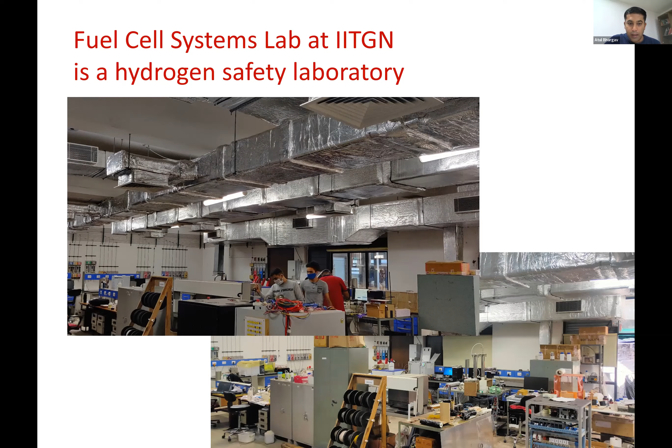This is our laboratory at IIT Gandhinagar, a hydrogen safety laboratory. It is equipped with the right kind of air ventilation, hydrogen leakage detection, and other safety systems required to handle hydrogen, carbon monoxide, and hydrocarbons all at the same time. This is one of the facilities we developed over the years, and this is where we work. Just to give you a glimpse of what we have developed so far, we are a very applied laboratory where we apply a lot of science and technology to realize prototypes and then demonstrate these prototypes, much like Professor Abhishek and his laboratory and research team.

So what have we done so far? Highlights of our research, which have resulted in prototype demonstrations, proof of concept studies and so on: we have developed at TRL6, in collaboration with Thermax, DST, and Reliance Jio, a replacement of a diesel generator for telecom backup power. Telecom backup power is one of the largest consumers of diesel in the country.

Just to give you an idea, diesel generators consume about 17% of the total diesel consumed in the country, and they are the second highest diesel consumer as a group. The biggest one is the transportation sector at 70%, and the second one is the diesel generator at 17%.

One of the things where diesel generators are used very often is cell phone towers. There are about 6 lakh cell phone towers, and with 5G they are expected to go up to 14 lakh towers. The grid is not very reliable in India. So we developed this technology to have a methanol powered fuel cell system that is more than double the efficiency of a diesel engine, has nearly half the CO2 emissions, is cost effective, and does not rely on imported diesel, which also gets stolen in many remote locations. It was a proof of concept demonstration, first of a kind in India, done in collaboration with these organizations. So that is one of our achievements.

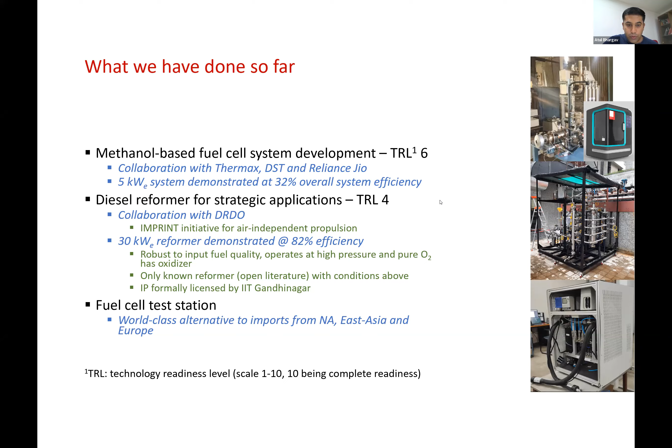So this is in a nutshell what we work on. I think if we were to put it in one slide, this is what we work on - we make a platform that is to some extent versatile and robust to fuel input.

Some places you have methanol available, some places ethanol, some places ammonia, CNG, bio-CNG, diesel in case of strategic initiatives, and others, right? And people are talking about green hydrogen. You might have heard of it, but it's not yet available. And so there is some uncertainty and unpredictability with respect to fuel availability.

So we want to make our system robust to that particular aspect, and our platform is that. So what we do is we have an internal converter that converts the available fuel input or hydrogen carrier input, as I will show in the coming slides, into hydrogen on board, on demand, and on site. And therefore, we are able to use fuel cells where previously fuel cells would not have been able to be used because of lack of availability of hydrogen.

And of course, that fuel cell is tied to something called balance of plant, which I will show in a moment. And then you get double benefit in the sense that you get electricity, of course, but you also get waste heat from the fuel cell stack, and this waste heat is at a high enough quality that it can be used for heating or for cooling. For those of you not familiar with mechanical engineering, you can also use waste heat to actually cool - it appears very counterintuitive, but it can be done. These are called vapor absorption refrigeration systems, and these are now becoming commercially viable. So when we couple it with that, this high grade waste heat can be used to cool as well.

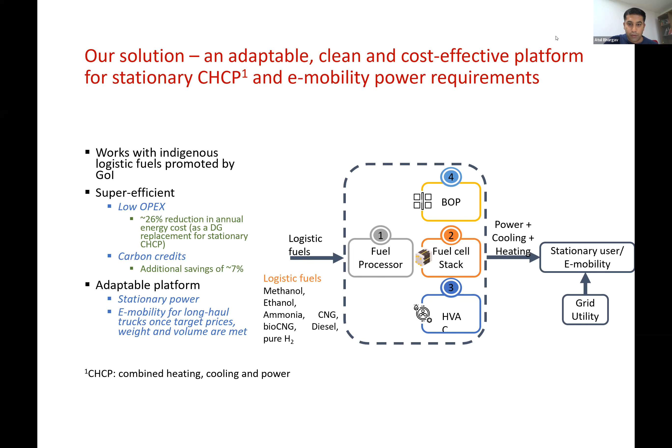And also in aviation, of course - in aviation there are some simplifications that we need to make, and these HVAC systems etc. might be too bulky and too heavy to carry. And so therefore we might have to make some changes to this platform. So this is the background of what we do.

Now, fuel cell, right? So I'm told you are students, so I'll just briefly describe what a fuel cell is, and also hopefully bring out what is different between a fuel cell and a battery, right? So for example, what is a simple fuel cell?

It's a different kind of polymer, but it's a polymer nonetheless. It looks like a transparent white polyethylene sheet. That's all it is. And what it does - it's selectively permeable to H plus ions. So if you have an excess of H plus ions on one side relative to the other, the H plus ions can go through this membrane and show up on the other side. Now, it's not permeable to other things, including molecular hydrogen. So hydrogen cannot actually go through. Hydrogen ions can go through, but not hydrogen itself, right? So whether you're talking about molecular hydrogen or atomic hydrogen, it cannot go through this membrane. Similarly, on the other side, you have oxygen or nitrogen, whatever it is, that cannot migrate to this side. Of course, there's a small migration that happens in reality, but as a concept, nothing else can migrate. Only these H plus ions can migrate. Why? Well, that's the chemistry of the membrane - that's how it's engineered.

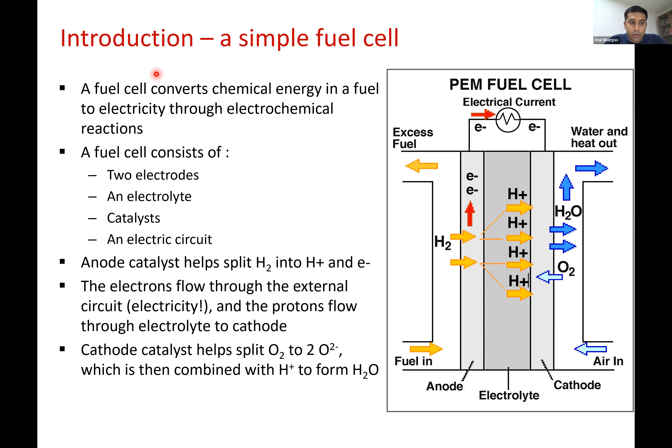Okay, so clear so far? Any questions? Please stop me at any time.

So what is it that we are seeing in terms of fuel cells? Fuel cells are basically energy conversion devices, and it's more similar in concept to a car or a bike, or a diesel engine, where the energy is stored externally. That is, energy is not stored within the fuel cell. It is supplied to the fuel cell in the form of hydrogen or another fuel for different types of fuel cells, and so the energy is stored externally.

So in your bike, you have a petrol tank. And in your car, you also have a petrol tank or a diesel tank.

So that is where energy is being stored. Where is it being converted? In the engine, and that is the fuel cell. So fuel cell is a converter of chemical to electrical energy. It's only a converter, it doesn't store any energy, right?

So imagine I have a Maruti car with an 800cc engine, and I want it to go at 200 kilometers an hour. It will not do that. So if I want to do that, I will replace the 800cc engine with perhaps a 1.2 liter engine, and then try to go to 200 kilometers an hour, and perhaps I will succeed. So what did I do? I increased the power of the engine.

And so therefore I was able to go faster. Instead, if I have a Maruti car with an 800cc engine, and I have to refuel every 600 kilometers, and I don't want to do that, supposing I only want to refuel every 900 kilometers, then what will I do? I will increase the capacity of the petrol tank. I will not do anything to the engine because I'm fine, I'm still going. But I will increase the capacity of the petrol tank to a higher capacity so that I can go 900 kilometers between refuels. So what am I achieving in this?

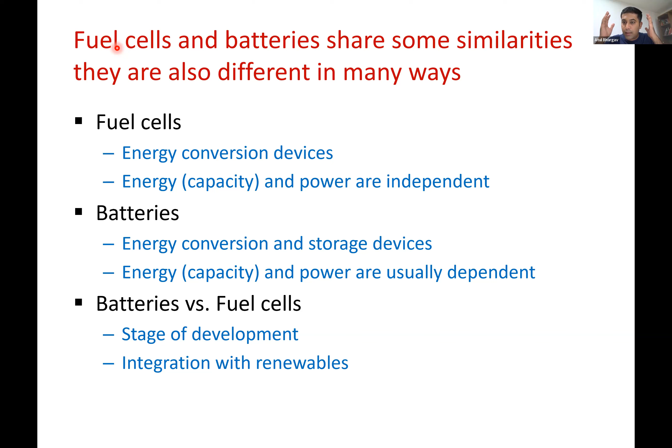Okay, so a bit about hydrogen. A lot of people have a lot of myths about hydrogen. Today, hydrogen, contrary to most people's beliefs, is not actually produced from sunlight. So the fancy idea is that you use sunlight to generate electricity, you use that electricity to split water and make hydrogen and oxygen. That would be nice if we can do it, and people are trying to do it.

But most hydrogen today is manufactured from methane. That is, you take methane or natural gas, you react it with water vapor or steam, and you get CO2 and hydrogen. There's a way to separate the hydrogen from the CO2 and then bottle it into various different purities and sell it to different people who want the hydrogen. So the idea is that today hydrogen is being manufactured from methane and not from renewable sources.

If it does, and when and if it does get manufactured by renewable sources such as solar and wind or biomass even, that will be called green hydrogen. Today, there are various colors of hydrogen. I don't want to go into too much detail because that's not the focus of this talk. There's gray hydrogen, green hydrogen, blue hydrogen, brown hydrogen, and so on. There's a very small percentage, as I said, which is produced by splitting water using electricity that is made from renewables. That is the ultimate goal, but we are not there yet.

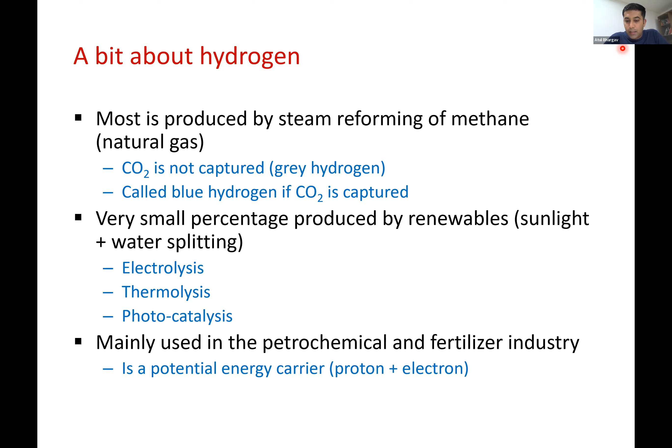Okay, and where is it used? It is used in petrochemicals, it's used in fertilizers, and increasingly in the cement and the steel industry, especially in the pharmaceutical industry as well.

What is it about hydrogen that attracts people? First of all, it doesn't have carbon. It is a fuel that does not have carbon, and that is obvious because we want to prevent global warming, climate change, etc. So, what is it that attracts us to hydrogen?

It has the highest energy density among commonly available fuels, 140 megajoule per kg. Just to compare, diesel is only 44 megajoule per kg, whereas petrol is 40 megajoule per kg. That's how much better hydrogen is with respect to energy content. But that's kind of deceptive, because it has very poor volumetric energy density. So if you compare it per liter, then hydrogen is extremely poor. You have 0.0125 megajoule per liter at STP, that is at standard temperature and pressure, if you don't compress the hydrogen, whereas comparatively, diesel is about 40 megajoule per liter. So look at that number, 0.0125 versus 40.

So what you got to do, you got to compress the hydrogen. That's one option. It's compressed to 350 bar, 700 bar, etc., which makes it expensive. First of all, you've got to spend energy to compress it. Then there are special cylinders that cost a lot of money, and you need safety protocols to handle this. Not everybody can handle it, and so therefore there are restrictions.

So there are other ways of storing hydrogen. There is direct chemical storage in the form of hydrides, which can store 2 weight percent. So if your storage tank weighs 100 kgs, only 2 kgs out of that is hydrogen. Compressed hydrogen, 5 kgs out of 100 kgs are compressed hydrogen. And there are other ways that we will talk about. What I showed you in the beginning is something that circumvents this problem. We work with methanol, with ammonia, which have 12%, 17%, 18% hydrogen carrying capacities. And that is why we work with these hydrogen carriers. So they are very, very energy dense.

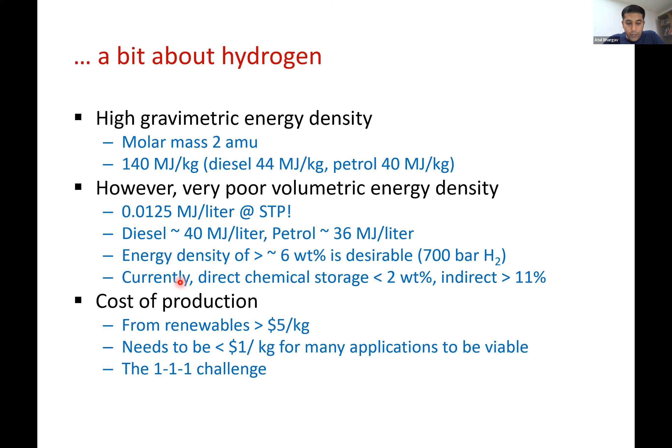So where are hydrogens and fuel cells being used today? For example, if you see the Amazons and eBays, they are extensively switching these forklifts that they operate in warehouses to fuel cell operated forklifts.

What are the advantages? The fuel cell operated forklifts go longer between recharges, and that's very attractive. Also they're cleaner, because you have to use this in an indoor environment. You cannot use engines, you cannot use CNG or petrol engines to power this, because this is an indoor atmosphere, so you need battery. Until now most of these are battery, but now increasingly being replaced by fuel cell.

Buses are increasingly becoming popular as hydrogen fuel cell buses. Of course the cost is still high, and we are slowly getting fuel cells into very many applications, including the stationary power applications that I talked about.

So with that, any questions so far? Any questions on whatever I have said so far? There is one question which Dr. Sirohi has - Jayant Sirohi has put in the chat. Yeah, I'm reading it.

In electrolysis, we have to supply power to break water into H2 and O2. So in this case, what makes the opposite reaction happen? Okay, wonderful, this is a very good question. So maybe what I will do is I will try to...

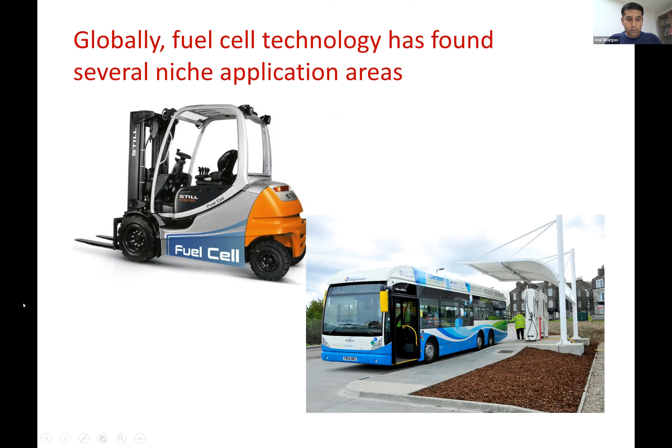Oops, okay, my stylus doesn't seem to work. So in the interest of time, I will just verbally say it, and I wish I can... let me see if I can. Okay, seems to be able to do it.

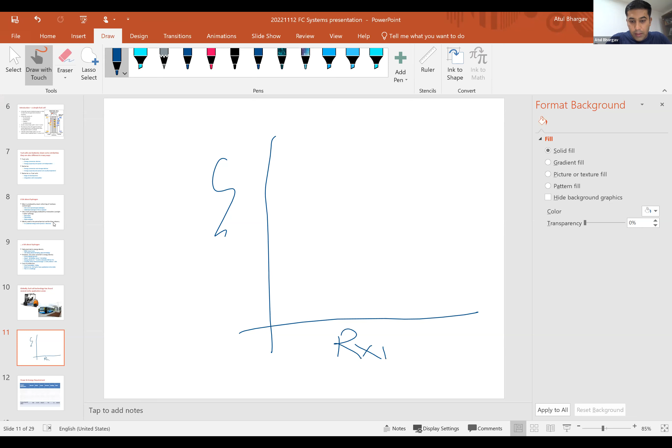So if you look at on a coordinate, let's say this is something called a reaction coordinate. And you have the reaction that we're doing: H2 plus half O2 gives you water. This is ultimately the reaction that we are doing. So if you look at where water is, it's somewhere there in terms of energy - let's call this Gibbs free energy, delta G.

So this is some kind of potential energy, you can say chemical potential energy. This is where the product is, H2O. And if you see how much energy the hydrogen plus half oxygen molecule have, that's there - so energy of hydrogen plus half a molecule of oxygen is here, whereas energy of water is here, potential energy. So given a chance, hydrogen would like to react with oxygen to go there. That's natural, it's like rolling down the hill - if you have something up at a height, it wants to come down. So we are coming down in chemical potential.

So that is natural, which means it's spontaneous, it wants to happen. So even if you have a mixture of hydrogen and oxygen and you put a spark, it can actually ignite and become water - that's natural, it wants to do that. But what I'm doing right now is not burning it, but putting a membrane in between, making the same reaction happen, but with some control over how fast it happens. And that is what a fuel cell is - basically I'm carrying out the same reaction, except I'm controlling at what rate the electrons are transferred from one place to the other, and so I'm controlling the speed at which this reaction occurs.

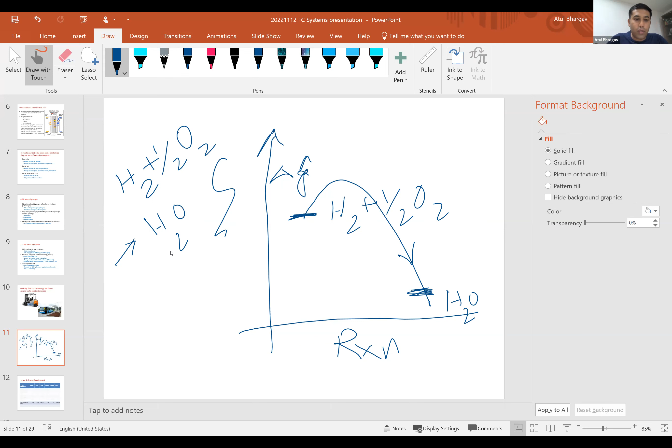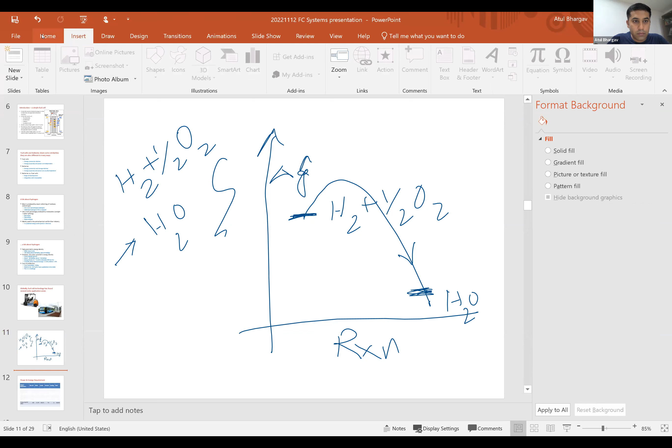Again, if you look at the individual reactions, on one side, for example - so if you split it up again and say okay, on one side I have hydrogen...

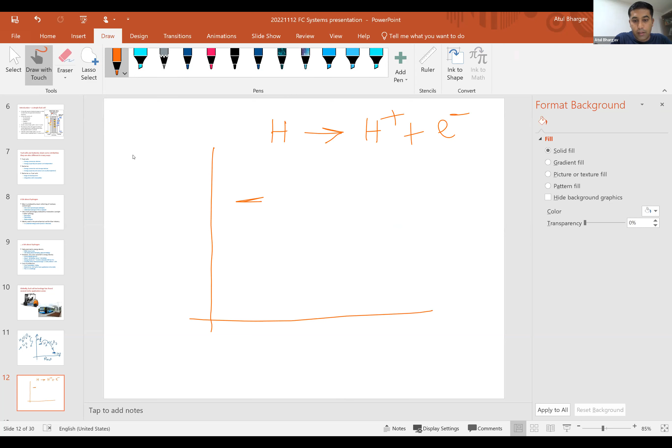So I'm doing this: H gives me H plus an electron, right? Now, if you look at the energy of this H, it's somewhere there. And the energy of this H plus an electron is somewhere there.

And that's why the H wants to go to H plus electron. The H plus and electron are not together. The H plus is inside the membrane and the electron is in the current collector, so they're not at the same place. But if you look at their combined chemical potential, it's lower than that of the hydrogen atom by itself. So therefore the H atom wants to go there.

Of course, there is something which prevents it from going there immediately, and that is the activation energy barrier. So there's some energy required to jump, that's called activation energy, that is very common in chemical reactions. So that much is required, but then you gain more than that when you go from H to H plus electron. So that is why it becomes spontaneous. And a similar thing happens on the oxygen side as well.

So now another philosophical question is, why do we do this in the first place? If you are saying I want green hydrogen, which means most probably I'll get it from solar or wind to electricity and then split water to hydrogen and oxygen, then ultimately I'm again doing hydrogen plus oxygen to get electricity. Why am I doing all this?

So the answer is same as why we take a bath every day. We take a hot water bath, basically from an electric water heater. Now imagine most of the electricity comes from coal. You burn coal, you generate thermal energy, you generate steam, you drive the turbine, you generate electricity, you transmit it, you distribute it. Imagine the kind of losses that take place in all of these conversions. And it gets to your house, and what do you do? You convert it into heat again, which seems like such a total waste of energy.

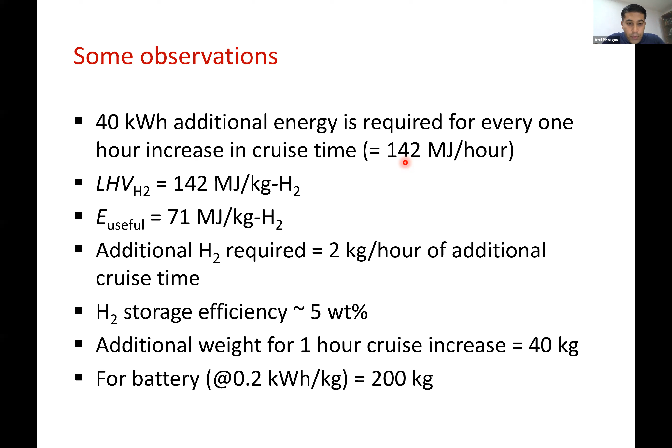Now, what we did was design it with a 60 kilowatt gross fuel cell, hybridized with about a 5 kilowatt-hour battery, and 2.9 kg of hydrogen carried in about a 42 kg cylinder. Total weight excluding electric motors, we were able to design in 123 kgs, and the cruise time we achieved was 1.23 hours. So this is what we were able to achieve.

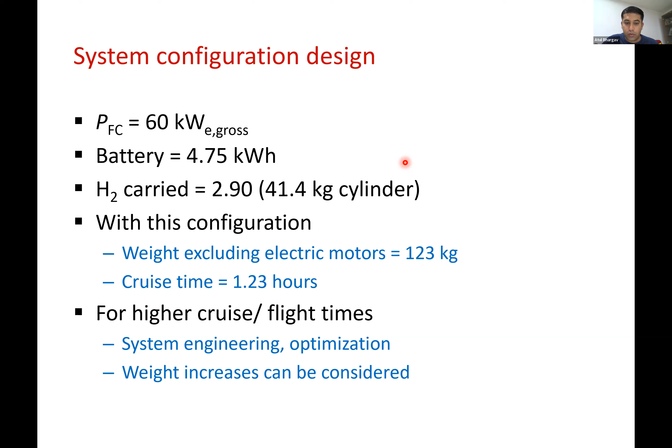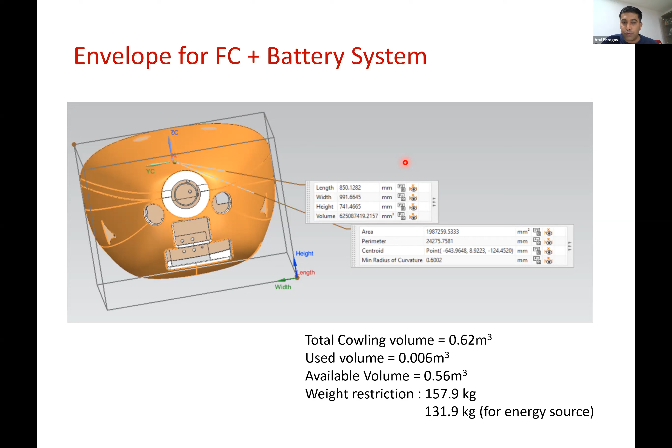We obviously need higher performance, and that's where we're headed right now. We're doing a number of system engineering and optimization efforts to improve much beyond this 1.23 hours we've achieved. Not only weight, but we also have to fit the volume in bigger aircraft, and we managed to fit it within the available volume and structure of the airplane. Going forward, if fuel cells become mainstream, aircraft will be designed keeping the fuel cell in mind rather than retrofitting an available aircraft. But anyway, we were able to fit it, and this is how the fuel cell system looks like.

Now, if you ask how this fuel cell looks and functions—we talked about that—but what are its characteristics? As with any other energy producing device, there are two important measurements: voltage and current. Voltage multiplied by current is power, and that is what we need from the energy conversion device.

Now what I've done here is eliminate the issue of big fuel cell versus small fuel cell in size. This area, I told you about the membrane—it can be a small membrane, about 5 centimeter by 5 centimeter, or it can be 20 centimeter by 20 centimeter. How do you compare the two? You compare it on a per unit area basis. When you do that, you get not current, but current density, which is amperes per meter square, or milliamps per centimeter square as the industry language uses.

Now voltage is on the y-axis and current is on the x-axis. If you look at the green curve, when I'm not drawing any current—when current density is 0—that means my circuit is open, and I have a very high voltage, as high as 1.2 volts. As I start drawing more current, my voltage drops, and this has to do with thermodynamics—I can go into it if required, but it's not pertaining to this lecture. So the voltage drops, but the product of V and I still goes up until a certain point when even the product starts to drop. That is power.

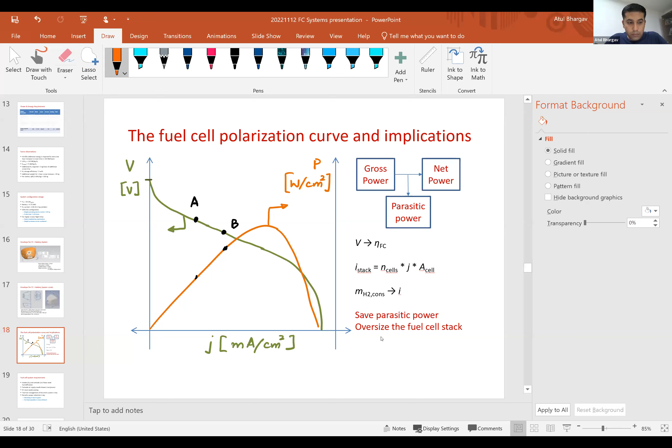All right, so let's look at it in a slightly different way. What are the system requirements? Abhishek, I only have 5 to 10 minutes, correct? Yes, yes, if you can wrap it in like 5 to 10 minutes. All right, I'll wrap it up.

So what are the system requirements? What are the difficulties we run into when we have fuel cell, hydrogen, oxygen, all of these things? It's not all a rosy picture. There are difficulties and challenges as well that we need to manage. The hydrogen and oxygen cannot be supplied as dry hydrogen and oxygen. Some of these fuel cells require humidification, and that is a challenge. So we need to manage the water. Water is also a byproduct, but water also needs to be in the incoming feed, and there are humidity exchangers installed which further increase the weight and volume. That's something we need to work with.

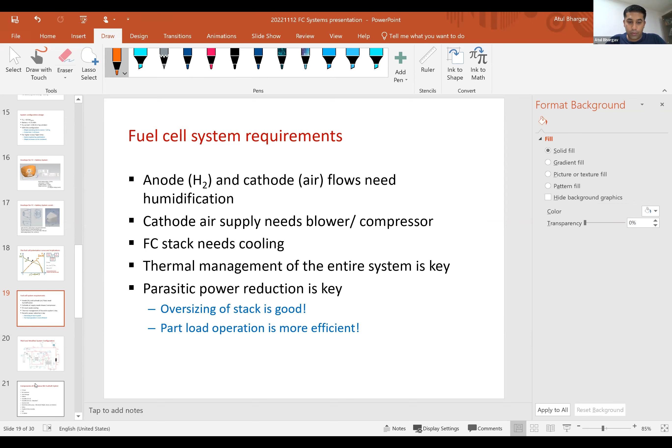The cathode side typically is harder than the anode side, which is the hydrogen side. Hydrogen splitting into H plus and electrons is easy, whereas oxygen splitting and adding electrons to oxygen is more difficult - it's called the oxygen reduction reaction. We need to maintain a high concentration of oxygen on the cathode side, and to do that we typically use compressors, fans, or blowers, which further adds to the weight and volume. And of course, thermal management is very key to the entire system. On ground, situations are much more under control, but in aviation we need to take care of a lot of other things changing with time, which need to be far more reliable than anything on the ground. So this is how the system looks like.

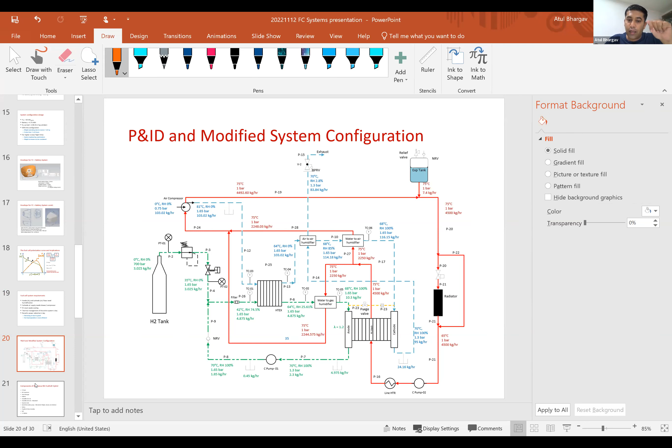Not going into too much detail - you might ask why construct such a complicated system for such a small vehicle. It still works out to be much better than batteries. Number two, this is the system as it looks today in a very simplistic manner, and I can try to engineer it so that a lot of these components are taken out. That will take a hit on efficiency and endurance, but I need to make a trade-off, which is why I study this system and ask what is optimum for my particular application. That is what we do at our lab.

So this is a list of components, but this is how we fit it into the cowl of the aircraft. This is a design that we're actually getting to implement. This is where we designed the fuel cell stack, thermal management, hydrogen storage, everything inside the cowl where the engine used to be before. You can still see there are holes for the propeller to come out, and there's a fan that comes out of the propeller blade that projects out.

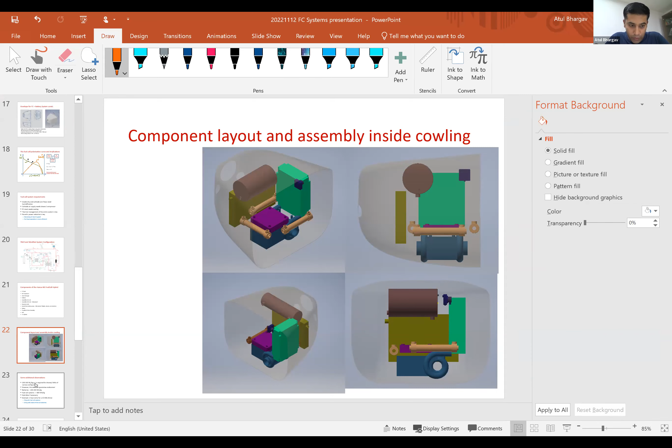So again, some very preliminary observations. Typically the thought process is that if you have 1 kg of takeoff weight, you need 200 to 300 watts of takeoff power. That means 200 to 300 watts of power for every kg of takeoff weight is required. Now, can batteries meet this?

Of course they can meet this. But what they cannot meet is endurance, how long you fly. And that is where fuel cell systems are far better than batteries. Batteries are about 200 to 300 watt-hour per kg, whereas fuel cell systems can be 800 to 1000 watt-hour per kg. That is 3 to 4 times better. So if you have a short endurance mission, or a very short flight requirement, you're perhaps better off with battery, especially the smaller ones. When you have larger vehicles and longer endurance requirements, you cannot do batteries.

And that is what I'm trying to get at. But sometimes you hybridize. Instead of carrying a very high capacity fuel cell, I'll carry a smaller fuel cell, but also a super capacitor or battery. I'll use that only for takeoff and landing, and during cruise I'll use the fuel cell mode. These are options available to a system designer, and we every day wrestle with these options to see which one is better.

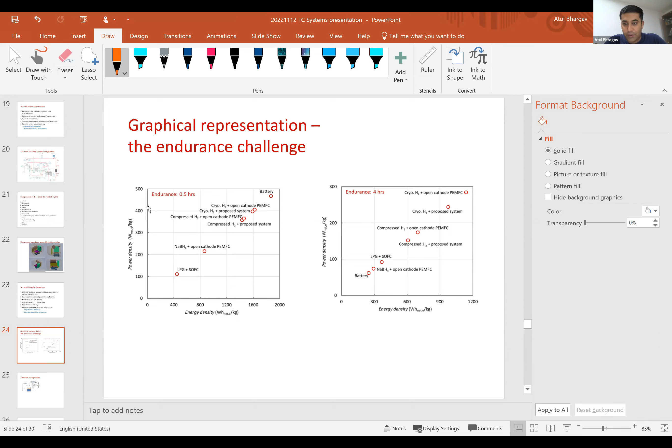So I'll stop here and leave you with questions that perhaps you will have. I just wanted to show you one alternate configuration. We can carry hydrogen in multiple forms, and sodium borohydride is one of those forms.

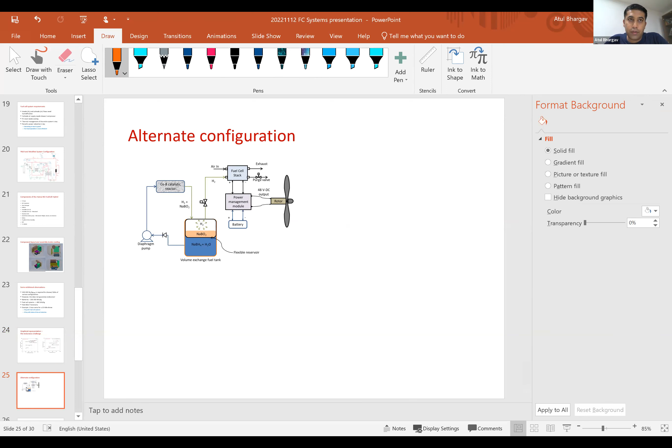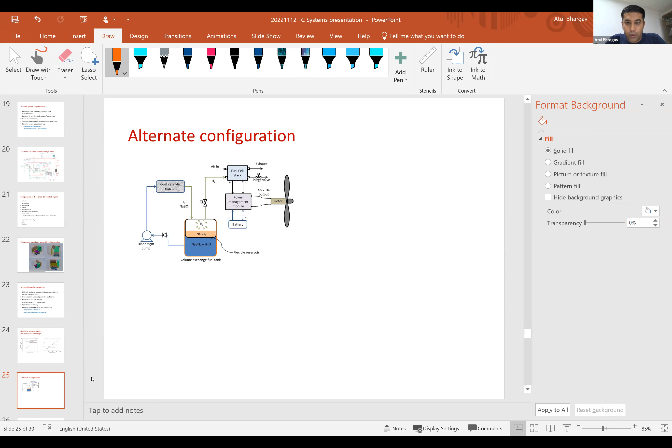Similarly, there are aluminum hydrides. There are other kinds of hydrogen storage that I can use depending on the application. Depending on the power profile, the endurance, the power requirement, I'll use certain options. But I'll stop here, I've already overshot my time and the next speaker might be waiting, so I'll take any quick questions if there are any.

Sir, I had a question. In the context of drones and UAVs, where we have constraints related to weight and size, and we have a heavy payload system which consumes almost 40 kilowatts of power, how commercially feasible and viable is it at this stage to power the whole system using hydrogen fuel cell technology?

What is the endurance requirement? Somewhere around 1.5 hours. I've reached out to a company called Intelligent Energy, who's making something very similar, and they have a maximum of 2.5 or 2.4 kilowatts of fuel cells, which according to me is not very commercially viable, though it appeals for a very good cause in the long run. But in the Indian context, where we have a very price sensitive market, do you feel that we have still reached a stage where something like this can be implemented commercially, or are we still at a nascent stage?

Yeah, I think commercially, the question is, what is the cost target? I'm basically looking in terms of endurance, where the existing battery system has a lot of limitations. You need to charge it to bring the drone back, you need to set up some infrastructure, plus you don't get the kind of endurance which fuel cell gives. There is no doubt about it.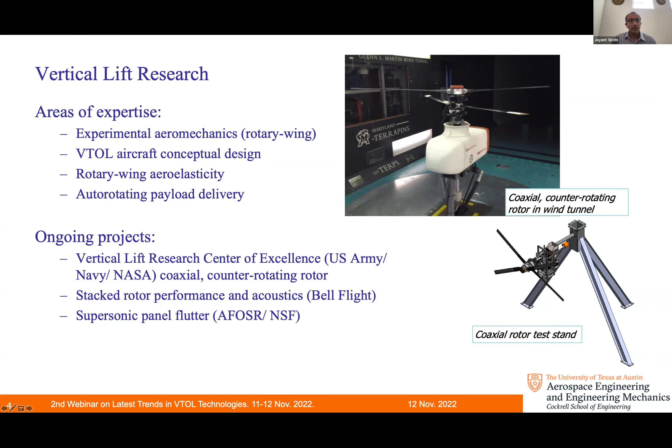Then we also have another coaxial test stand, which has a horizontal shaft. The reason for that is we do a lot of optical diagnostics on these rotors. Here's an example. We have the rotor mounted in a horizontal configuration, and this is a fully instrumented rotor. It has a swash plate. The hub can be articulated or rigid hub. In this particular case, it's a 2-meter diameter coaxial test stand.

The blades are painted in this fluorescent orange, you can see, with some pattern of dots on them. The reason for that is we use it to measure the blade deformation. As the rotor is spinning, we can illuminate it with lasers and then take images with a high-speed camera. With the high-speed video, we are able to extract the blade deformation. You see that here in this picture.

This is a composite image of the rotor disc strobed at 32 per revolution. As the blade goes around, you can capture it and extract the deformation as a function of time. From there, you can do various things like modal analysis. You can calculate the rotor blade frequencies, mode shapes, and so on. So that's the rotor blade deformation using digital image correlation.

We also can measure the rotor wake using PIV, that's particle image velocimetry. Here's a snapshot. The rotor is, again, sideways - this is a rotor blade. We illuminate the rotor with a laser sheet, and we apply some fog particles in the flow field. By tracking the fog as it moves through the laser sheet, we are able to measure the flow velocity through the rotor.

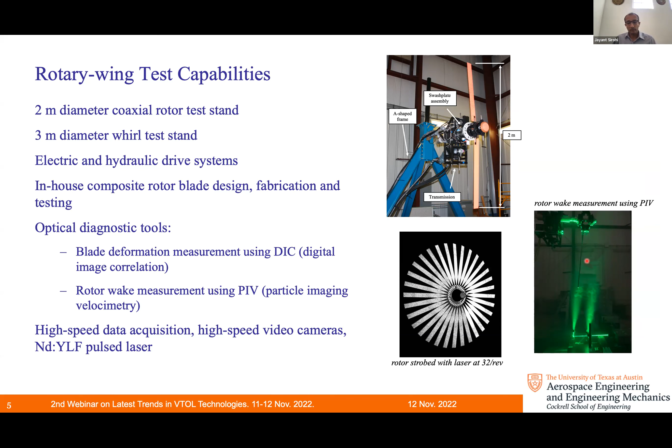We also are doing some work in acoustics. We have an outdoor test facility here. This is a picture of the rotor, and we have some microphones in an arc around the rotor. Here is the actual picture of the system with those white things on the ground - those are the microphones.

So this is a video. Let me see if I can play it. I have many videos in my lecture.

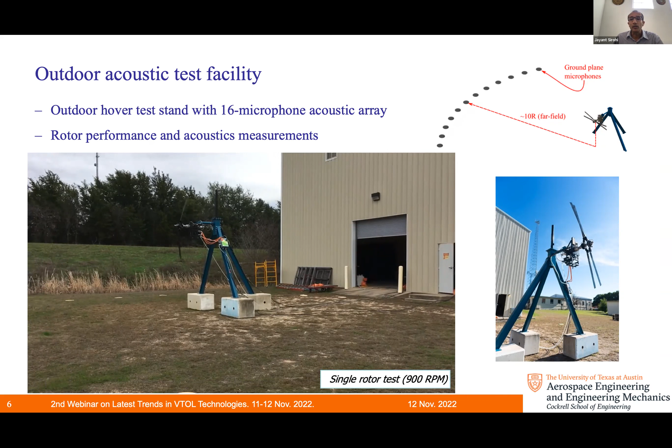So that's the full test matrix, which will involve many different operating conditions. And the 2-meter diameter rotor can absorb maybe something like 12 or 15 kilowatts. That's the range of power that we're talking about.

Okay, so coming to the topic of today, I'm talking about aerial payload delivery. If you want to deliver a payload from an airplane to a point on the ground, typically the way it's done today is parachutes. Here's a picture of many parachutes and people hanging from the parachutes. That's a very reliable way of doing it. It's been done like that for a long time, except it is very susceptible to wind, so the accuracy is affected by the wind.

For example, here is a calculation of the trajectory followed by a 10-centimeter ball, just a sphere, if it's dropped from a height of 50 meters, in a 5 mile per hour mean wind with some random variations. You can see that the trajectory is very significantly affected by the wind, and this is just a small ball. So imagine if you have a large parachute and a payload hanging from it - it can definitely be diverted considerably far from where its intended landing zone is. Not only does it get diverted, but there is also a very large spread in the possible landing zones due to the stochastic nature of the wind.

So how do we make this a better or more accurate drop for the payload? Now, this is probably not so important if you are dropping in a big field like this, but for any kind of payload where you want it to drop at a very specific, precise point - like, for example, giving emergency supplies to people floating in a boat in the sea - you need it to fall in the boat, right? You don't want the payload to fall in the sea, because then it'll be useless. You don't want the supplies to be lost in that way.

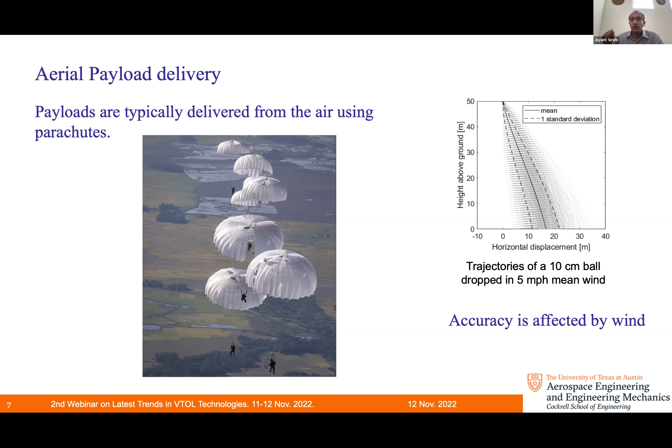One way we're looking at is using an auto-rotational decelerator. Here's a picture of a maple seed, an auto-rotational decelerator found in nature. It falls from the tree, there's a seed, and as it falls, it rotates. It's basically a helicopter rotor operating in auto-rotation. The state of auto-rotation is such that there's an energy balance between potential energy, the rate of change of potential energy as the rotor drops, and the kinetic energy of the rotor itself.

These kinds of decelerators are found in nature, and they've also been developed into many applications in the past. For example, the Kaman Rotochute, as you see here. This is a person holding the Rotochute at different scales - you can see a very large one and a very small one in his hand. So it can be made over a very large range of scales.

What are the advantages of this thing? Firstly, you can have greater control over the loads compared to a parachute, because it's essentially a helicopter rotor. And when you look at a helicopter rotor, you can apply cyclic and collective pitch control to it. By doing cyclic pitch control, you can steer the rotor to any sideways direction. You can make it essentially glide and increase the range of travel as it descends. So it's basically like a helicopter rotor that you're trying to control as it's descending, giving the possibility of guided flight with cyclic control.

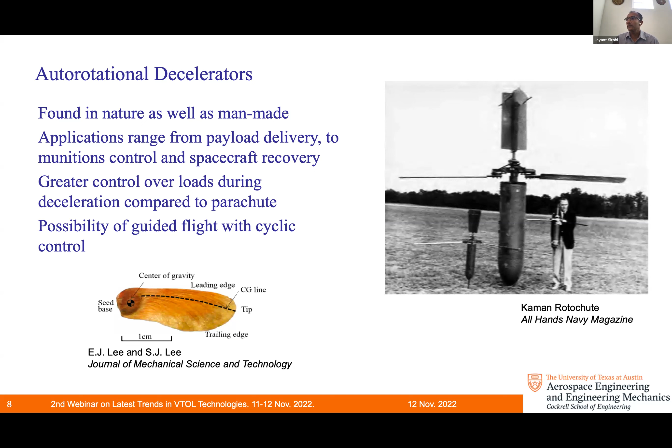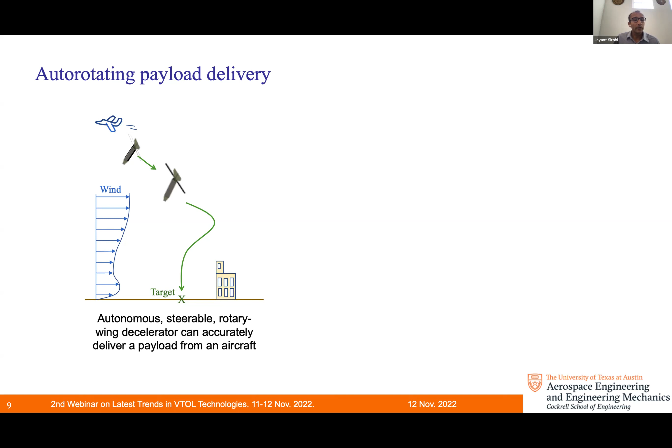So this is the kind of concept we want: we have an airplane or a helicopter, we drop this package, there's a wind profile and there's a target that we reach. We want an autonomous steerable decelerator that can be deployed from an aircraft and accurately deliver the payload.

Here is the prototype schematic. You have some control mechanism, the rotor, the body and nose cone. The body holds the payload, and we want the rotor to fold up against the body itself so it can be stowed in the aircraft. We don't want this rotor sticking out and open all the time, because that would be very inconvenient for keeping it in the aircraft. So you want the rotor blades to fold up against the side of the device like this.

This is one of the prototypes we made - just a loop with a ribbon to drop it from a drone. You can see the blades are now folded up nicely against the side of the payload itself. So that's the concept we're going to go forward with.

One more important thing to note is that it's possible to do all this using a flight control system and a very complicated swash plate that changes the collective pitch and introduces cyclic control. But here, we want to make it as passive as possible. Can we make the blades deploy in a completely passive fashion from this stored position along the side of the body? Can we make the blades open up and deploy passively? The rotor's collective pitch versus time is also controlled passively. The only thing active will be the cyclic control, which we can implement in a very simple manner.

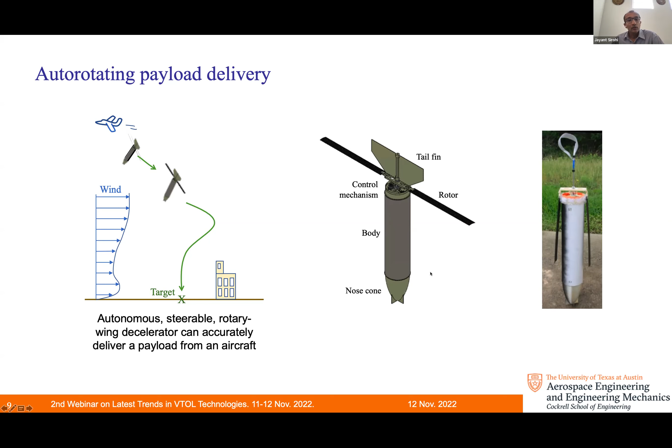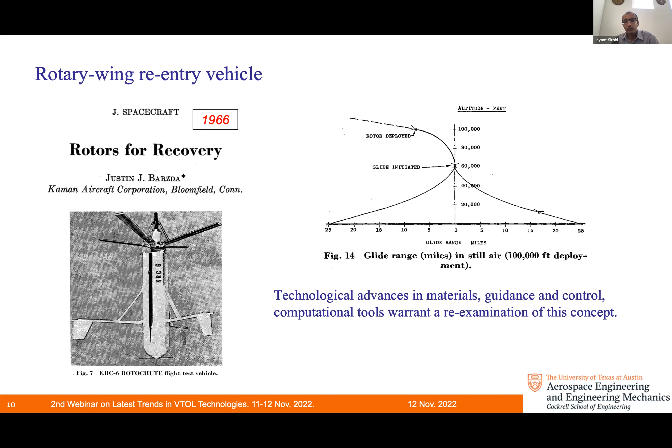But it had to have a very complicated control system in terms of linkages, swash plates, and all that. So using technological advances in materials, guidance, control, and so on, we want to re-examine this concept. Can we make it as simple as possible, but also retain the functionality of having a deceleration, but also a steerable deceleration to a specific location on the ground? That is our motivation. So we built a prototype.

The prototype could fit in a 1 inch by 1 inch by 8 inch volume. Here you see the dimensions. And the rotor blades were basically a thin circular arc airfoil so that you can fold them up against the side of the body itself. So this is the picture of the whole system when the rotor blades are stored.

And we wanted to make sure that this is very robust. So we made it in this way so that we can shoot it out of a pneumatic gun with a 1 inch by 1 inch barrel. We can shoot it out in any orientation we want and see if the rotor blades deploy passively by themselves in any orientation and if they are survivable. So that's why we made it in this very small form factor, because it's then easier to scale it up and then drop it in more benign conditions.

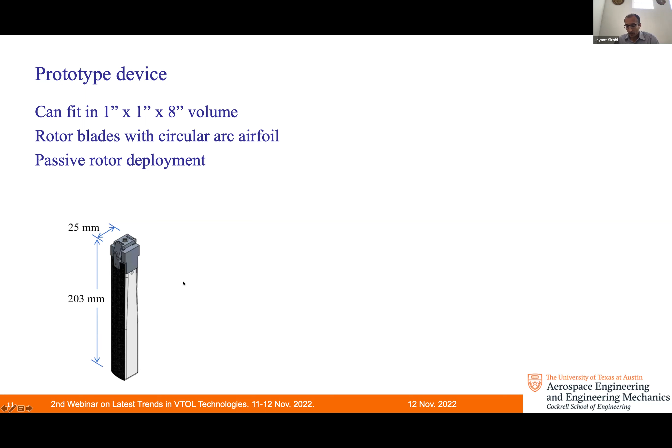As soon as it is launched, the blades open up like this. Completely passive. They open up purely because of inertial forces and aerodynamic forces acting on the blade and the whole body as it tumbles through the air. Once it opens up like this, the airflow starts interacting with the blades and the rotation starts. As soon as the rotor starts rotating, centrifugal forces on the blade make them extend outward.

And you get this kind of situation here where you have a free stream velocity from below due to the descent of the whole device, and the rotor blades are spinning. And the rotational, because of rotation, the centrifugal forces keeping the blades extended out like this. So this is a stable auto rotation condition in which it's descending, and it then can be steered to the location. So this is a prototype to explore the concept of, can the blades be deployed completely passively in any orientation? And can we get the required performance in terms of descent velocity?

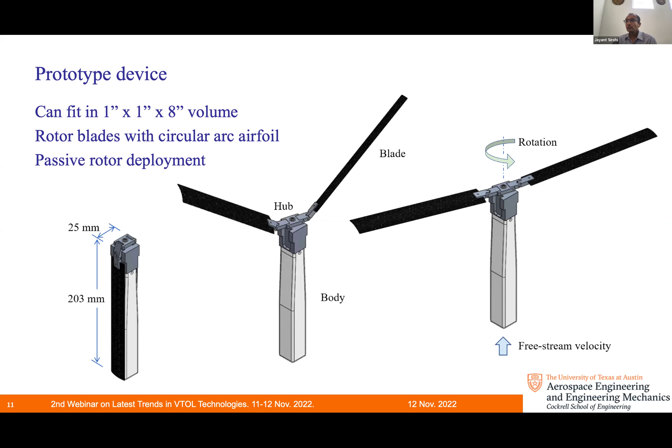Let's look at the operating conditions at the airfoil itself. Here we have a cross section of the circular arc airfoil. This dark black thing is a circular arc airfoil, and you have incident velocity. This is the rotational velocity. This is the descent velocity minus the induced inflow. And here's a relative velocity. So that creates a large angle of attack for the blades.

Now, the blades are not spinning to begin with, right? They have just deployed, and there is a large incident velocity coming from below because it's falling through the air. Now we need to make the rotor start rotating. And the only way we can do that is to make this incidence angle negative, so that the angle of attack creates a lift vector and a drag vector that have a resultant along the direction of rotation. So this resultant, that's L sine phi minus D cos phi, has a resultant that's along the direction of rotation, creating an in-plane accelerating torque that makes the rotor start spinning up. So now the rotor blades have this accelerating torque, so the rotor spins up and reaches a steady state operating condition.

So the conclusion is that we need a negative collective pitch for initiating the rotation in this direction. But once it reaches steady state, if it has a negative pitch, then the thrust it can produce is not so high. So we need a positive collective pitch to generate high thrust. So these are two contradicting requirements. Initially, we need a negative pitch to start the rotor. But if you want to minimize descent velocity, or maximize the thrust and make it spin up as soon as possible, we want a positive collective pitch. So you want to transition from negative to positive pitch, and again, we want to do this in a passive way. So we came up with this articulated hub design.

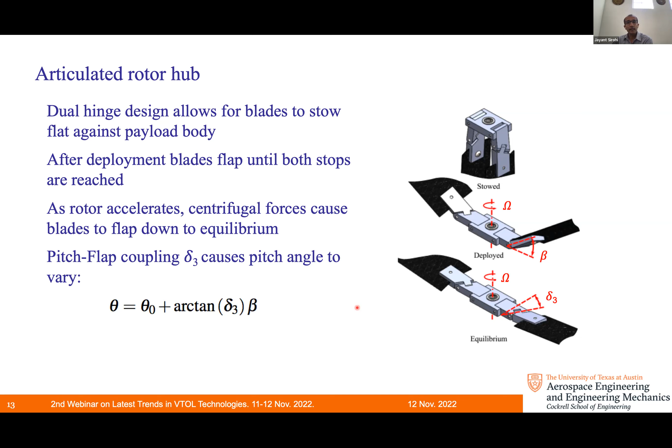I'll show you a video of how this works in a little bit. But first step, this is typical for any kind of air vehicle project. You come up with a conceptual design, make an analysis, then make a little prototype, do a wind tunnel test, and do a flight test. Then you can compare your analysis with all those measurements and see if you can scale it up to an actual air vehicle. So that's the same process we followed here.

So here is the wind tunnel setup. The wind tunnel flow is coming from left to right in this case. The rotor is a fixed pitch rotor, just spinning this way. And there's a load cell and an optical switch that determines the rotor speed.

So we tried two different types of hubs. First, there's a fixed pitch hub to find the relation between the descent velocity, which in this case is the wind tunnel velocity, and the rotor speed and rotor thrust. This we can match with our analysis using a simple blade element momentum theory. Then we put in the articulated rotor system, which has the sequence of hinges, and we tried out untwisted and twisted blades to see how they behave. So that's the general process.

So here, a quick look at the rotor properties. They're about the same rotor radius, about 200 millimeters, and about the same chord. The differences occur because of the design of the rotor hubs itself. We tried some linear twist, and we have a delta-3 angle. That's the most important thing here, of minus 30 degrees.

And we also limit the flap angle to 45 degrees, because if you allow this thing to flap completely, it's never going to start spinning. It's just going to flap all the way back and drop straight down. So we don't want that to happen. We limit the flap angle to 45 degrees, and in that situation, it's going to start rotating in the right direction.

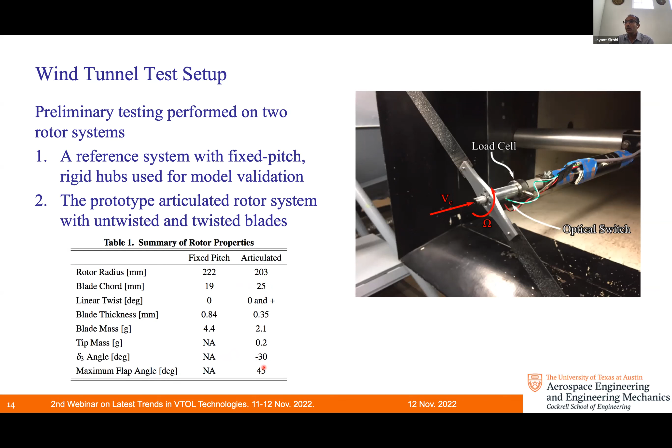So here are some results with a fixed pitch hub. Again, this has no hinges at all, just a fixed pitch hub. I'm plotting descent velocity here on the x-axis, that's the wind tunnel velocity, and the thrust on the rotor itself. You see different collective pitch angles - this should be a negative angle here: -2, -6, and -10 degrees. With -10 degrees, you see that there is less thrust, right?

But you need the -10 to initiate rotation in the correct direction, though your steady state thrust will be low. As you increase the collective pitch from -10 to -6 and -6 to -2, you get more thrust. So thrust increases with the pitch angle, whereas changes in rotor speed are relatively small, around 2000 RPM at 6 meters per second. But there's a large variation in thrust. This shows that we need a negative angle to start the rotation, but an increasing angle to create more thrust. In all these cases, the rotor operates at a constant tip speed ratio and constant CT.

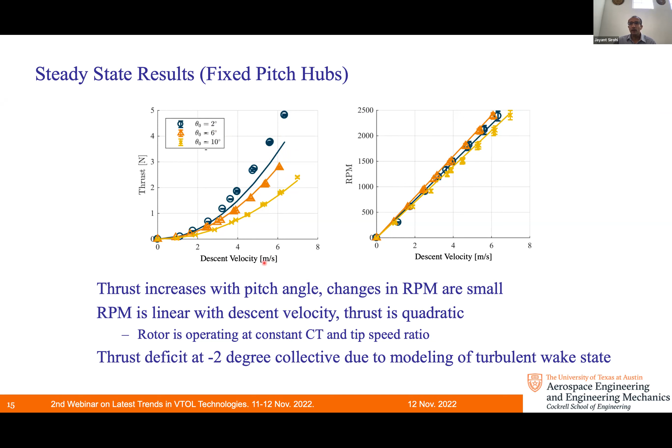We also have those solid lines, which are our analysis. You can see that once we get into -2 degrees, you've entered this turbulent wake state. It's very difficult to have a good aerodynamic model for such small pitch angles.

So that's what happens with a fixed pitch hub. The conclusion is: more negative pitch gives faster spin up, which we want, but then we need to increase the collective pitch to a positive value to get large steady state thrust.

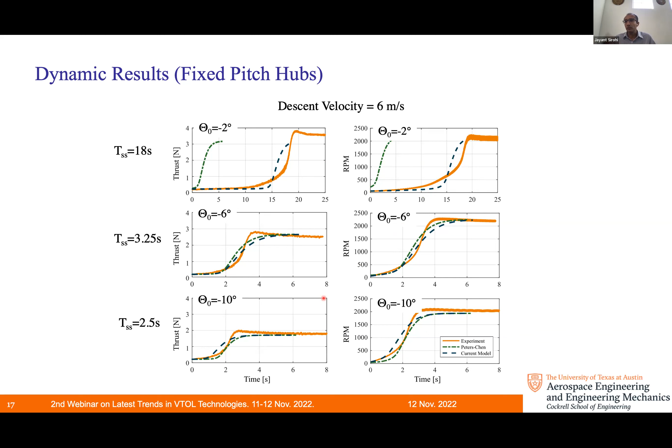With the Peters-Chen model with dynamic inflow, it doesn't match so well, and we have to make some modifications, including large aerodynamic angles and so on, to match it. So next we'll look at...

With the articulated hub, we see that as you increase the descent velocity, the thrust doesn't go quadratic anymore, and the rotor speed also has some discrepancy. In these cases we're using twisted blades, and the blades are very thin, so there's a lot of elastic deformation that changes the results a lot. But it shows that even with the articulated hub, it's working as we expect - we're getting a good amount of thrust, and we can stabilize it somehow by adding a little leading edge mass.

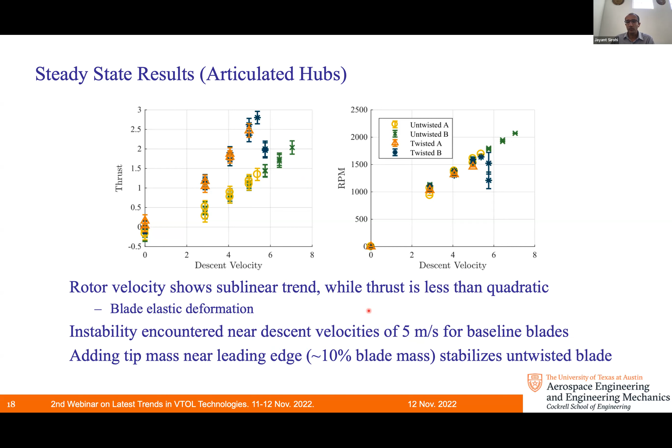Let's look at a video here - this is very important. On the left, we have a high-speed video of the rotor in the wind tunnel. This is the person's hand holding the rotor. The incident wind is from the right to the left. The rotor is held in this position, as if it's just released from a stored position. As the video plays, you will see...

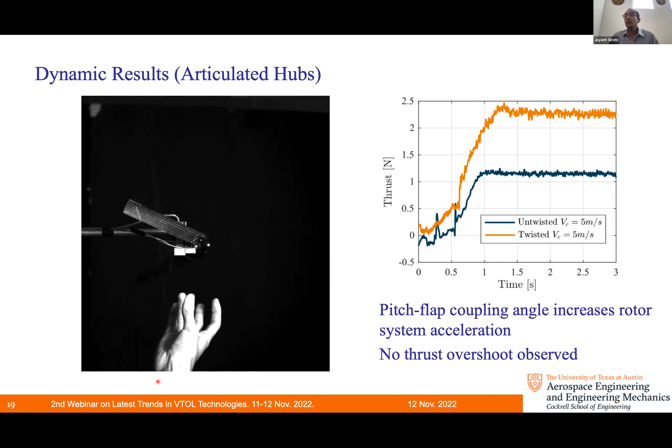You see that the rotor blades flap all the way back, hit the stop, and start spinning. Can you see the video? Yes, it's playing. Good, so now you see it's spinning.

It started spinning almost instantaneously as it flapped back. As it's spinning, the rotor speed increases, centrifugal forces on the rotor blades increase, and they extend outwards to reach steady state.

This also has a big effect from twisted or untwisted blades. Although for an optimum hovering rotor you need a negative twist distribution, for good performance in autorotation we need a positive twist distribution. On the right-hand side, you can see that with the twisted case you have a much higher steady state thrust; the untwisted case has a lower steady state thrust.

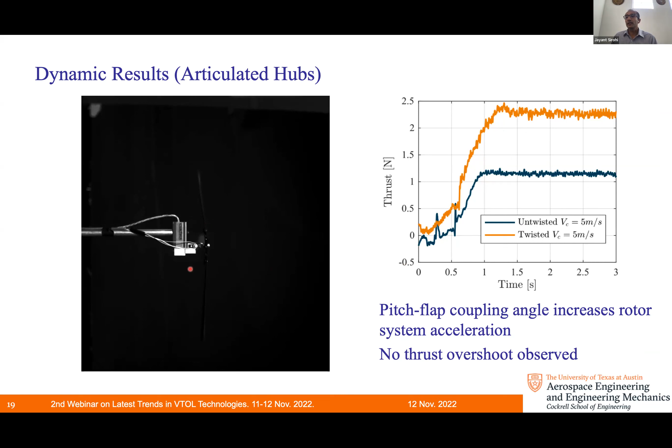More importantly, the rotor started spinning and reached steady state thrust in just about a second - a very fast spin up. The pitch-flap coupling increases the rotor acceleration, and there's no thrust overshoot - it just smoothly reaches steady state velocity. That's the operating principle, right? With this high speed slow motion video, you're able to see exactly how the rotor blade is deployed.

Okay, so next we started building a flight test article. This is to be dropped from a drone or shot out of a pneumatic cannon to make sure all the rotor deployment works in any orientation of the body or any crosswind. We also instrumented it with a microcontroller to take all the data - there's an altimeter, 9-degree of freedom IMU, and a Hall sensor to measure rotor speed. All that is enclosed in this little 1 inch by 1 inch square cross section with a battery. Total mass was kept at 150 grams. You can see we added some mass here just to make the mass more realistic, like a payload.

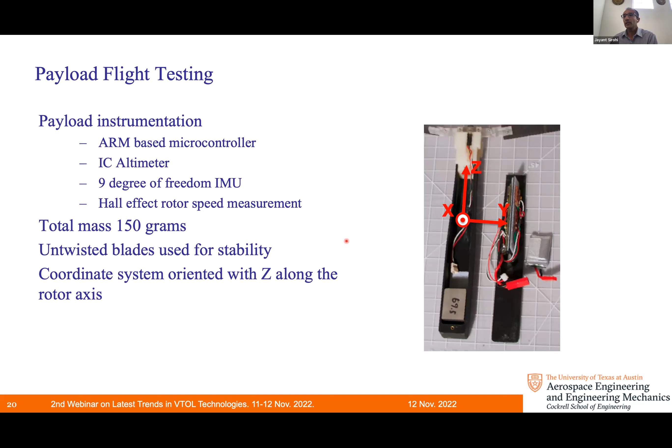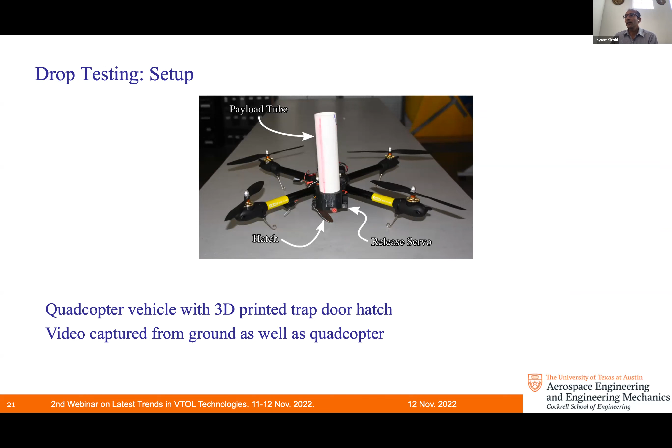We have a coordinate system where the z-axis is oriented along the rotor axis, and we use untwisted blades because they're more stable in this case. First step, we dropped it from a quadcopter, modified to have this payload tube with a servo and a hatch door that opens on command.

We can see a video from the quadcopter itself. As the video plays, you'll see it flying over the ground. As soon as it dropped, the rotor blades deployed.

Let's see that again. The door opens, it drops, and the rotor blades immediately deploy, and the rotor starts spinning.

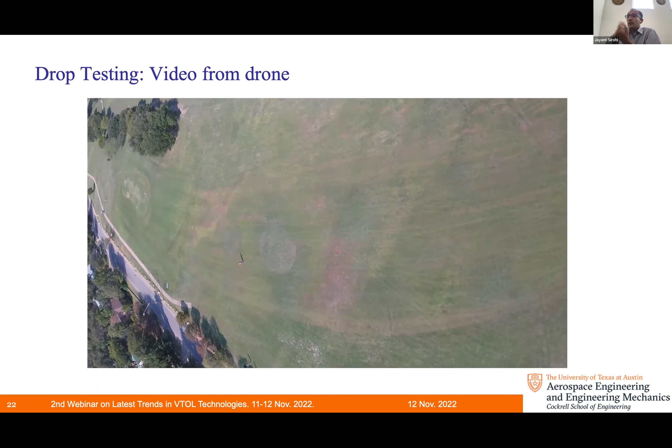So this was the drop from a drone, a very controlled environment with not much crosswind, and the whole payload delivery device was pointed down, which is the best orientation for the rotor to start spinning. So there's not much challenge in opening or deploying the rotor in this case. We know it's going to deploy; we just want to make sure the analysis matches our experiment.

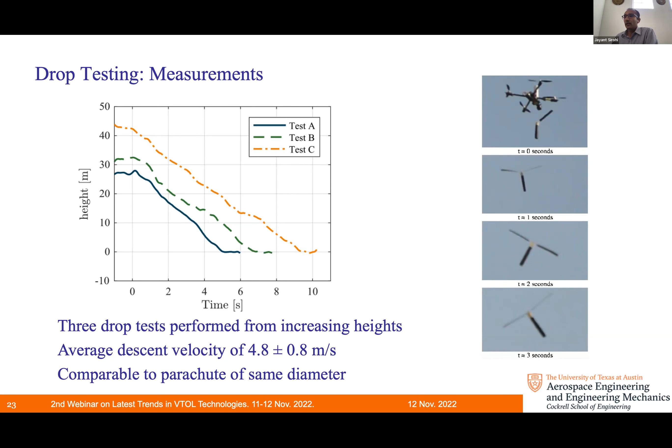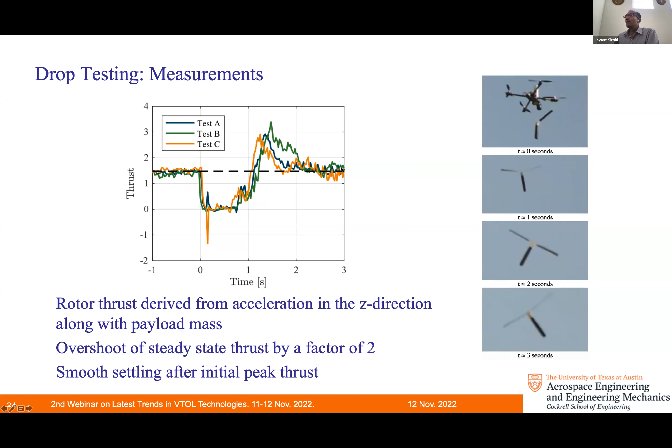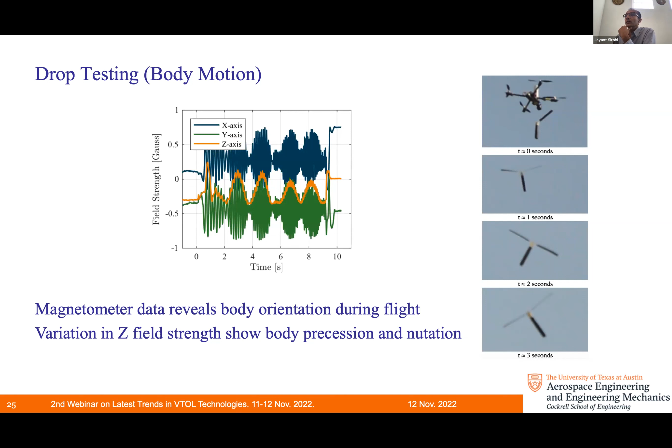Although the rotor is spinning and supported by two bearings, there's a very small friction in those bearings, and after some time a small torque is transmitted from the rotor to the body itself, making the body start spinning. So the body is spinning while dropping, and the whole thing acts like a gyro, with some precession and nutation. This is something we need to address - how to minimize or cancel the body rotation. It gives a large amount of body rotation, which you can see here in the green and blue.

Next step was to try to launch it from any orientation. The goal is, can this thing deploy its blades and be survivable even with a crosswind or if it's dropped in the wrong orientation? Because we don't want it to always be dropped exactly straight down - that's just not feasible in real life.

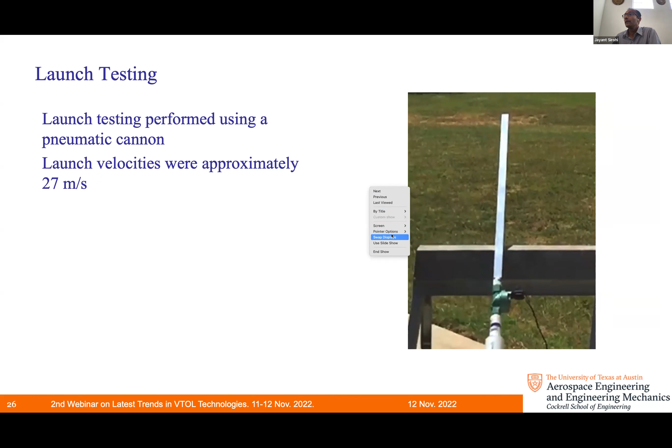So we looked at two different launch orientations: either shooting it out rotor first, or shooting it out with the bottom first — we call it head first or tail first. Tail first means as soon as it's launched from the cannon, it sees a very large dynamic pressure that's making the blades open up. That's a very extreme condition where you want to test if the blades are strong enough and the deployment is as we expect.

Then we also shoot it head first, meaning the rotor hub goes first. This is a totally opposite condition, because the dynamic pressure due to launch velocity wants to keep the rotor blades in the stored position, so it doesn't want to deploy at all. But after it launches from the barrel, there'll be some tumbling, three-dimensional motion introduced because the offset brings the CG and center of pressure out of alignment. As it tumbles, air will be incident on the rotor blades from below, and at some point it's going to start spinning. So the question is: how long does it take to initiate rotation, even in the worst case, with a head-first launch?

If you look in nature, maple seeds have a seed on one end and a rotor blade, like a membrane, on the other. On the tree, the seed is upward and the blade points downward, so when it drops, it always enters autorotation. There's only one geometry where the maple seed won't autorotate: when the seed points exactly downward. If you hold it by the membrane with the seed pointing straight down and drop it, it falls straight down without spinning. Interestingly, in nature it's held in exactly the opposite position, so that non-spinning orientation isn't a factor. So we want to make sure our device spins in any orientation.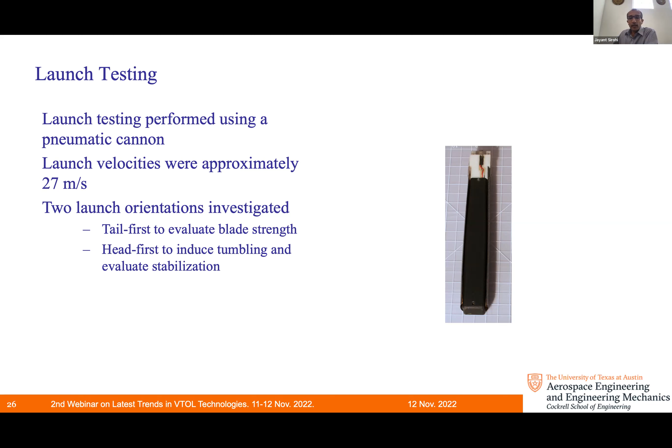The first video I'll show is launched from the gun in a tail-first deployment. You get immediate deployment of the rotor blades as soon as it reaches launch velocity and leaves the barrel of the cannon. So here's the video to the right: it launches, blades deploy immediately, it's spinning immediately, and as it falls it enters autorotation. This is the worst case scenario for blade strength.

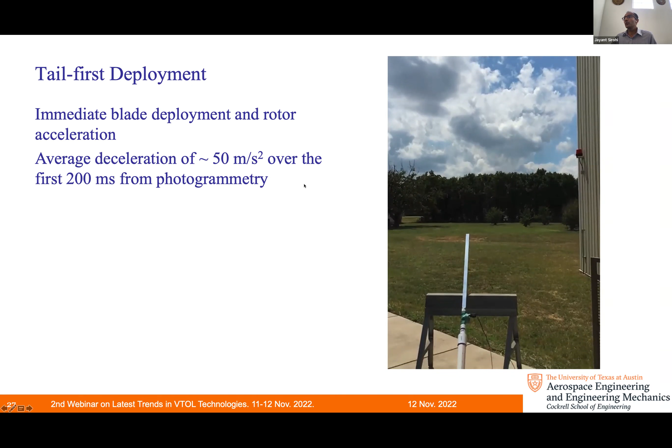Let me play this again: it launches, blades open up immediately and start spinning. If the blades survive this kind of launch, they should survive any launch orientation. We have a high-speed camera looking at it from the side, and using photogrammetry, we can see it's approximately 50 meters per second squared in deceleration produced by the opening of the rotor.

Here's a side view. On the right-hand side, down here, that's the barrel of the pneumatic cannon. As this slow motion video plays, you'll see the projectile come out of the barrel and the blades open up and deploy. So there it comes — the blades open up very soon, and the rotation starts.

A very interesting thing here is that since the blades are made very flexible, that actually helps them survive the launch. The launch loads are very high, but because the blades are flexible, if you look at a close-up, they fold all the way back and almost cross — yet they haven't broken, because their flexibility allows them to withstand these dynamic pressures. Then the blades open up again, and as you see in this composite image, the rotor starts spinning, centrifugal forces push the blade out, and it reaches a stable condition.

Now there's a very large drag on the rotor, and the center of gravity is up here, so it stabilizes itself and enters a steady descent for the rest of the drop.

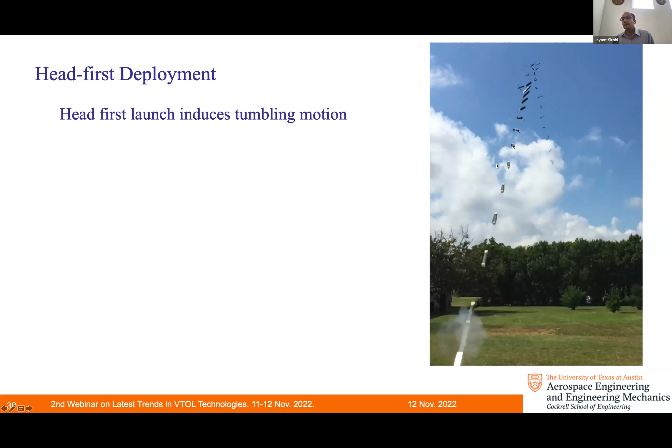Okay, then we did a head-first launch — this is a composite image from the video. As soon as it leaves the barrel, the blades stay stored against the body of the device for a long time, because the dynamic pressure keeps them stored. It reaches the top of its trajectory and starts tumbling. As soon as it tumbles, there's incident velocity from the bottom of the rotor blades, so the blades open up, and you can see it entering stable autorotation. The deployment stabilizes the payload, and you can reconstruct the trajectory looking at the X and Y positions and height on the Y and Z axes.

So this is the launch. It goes straight up because the blades are still stored, and starts tumbling here. Blades deploy, and as soon as they deploy, it enters stable auto rotation, and the prevailing wind brings it to a sideways glide. So this whole portion, from about 20 meters downrange to 40 meters, is all in auto rotation. Those are the results of the launch test.

So at this point I'll conclude. We designed this autorotative payload system and tested it. We demonstrated steady state descent characteristics similar to a parachute, and we showed that the blades are not only strong enough to withstand severe launch conditions, but also reliably enter auto rotation from almost any orientation. That's very important in terms of payload delivery.

Although we're not going to shoot it out of a cannon like that, there could be a large crosswind when you deploy it from an airplane, so it's important that it stabilizes and deploys as soon as possible. We also validated these analytical models against the wind tunnel tests and the drop tests.

Now that we have the model, we can explore how this can be scaled up to larger payloads. This one was basically 200 grams, 150 grams all-up weight. Can we make it carry a 1 kilogram payload? Can we make it carry 10 kilograms or 50? You can explore that kind of scaling with a simple conceptual design study using this validated analysis.

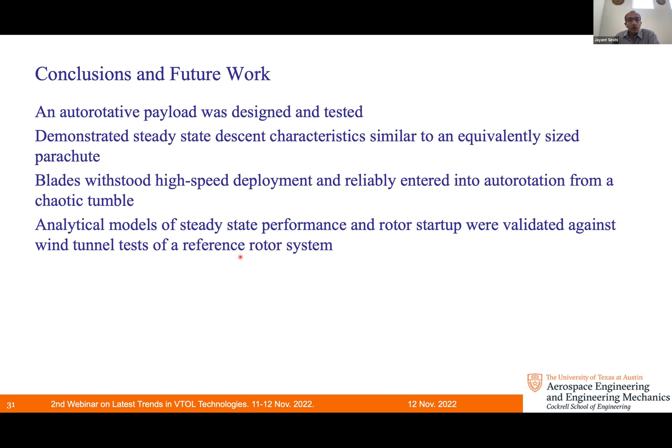Before we go to the audience, I have a question. In these experiments, do you always see it start precessing toward the end, or does that only happen once in a while? The precession will always happen in this case, because when you look at it — let me show you back here.

Like even here, you see the rotor is now a very large source of drag, and the CG is below it, but it becomes an unstable system. So there's a pitching moment on the whole body — a destabilizing pitching moment — and that's what causes the precession. So eventually it's very important to have a tail on this thing, and the tail stabilizes it.

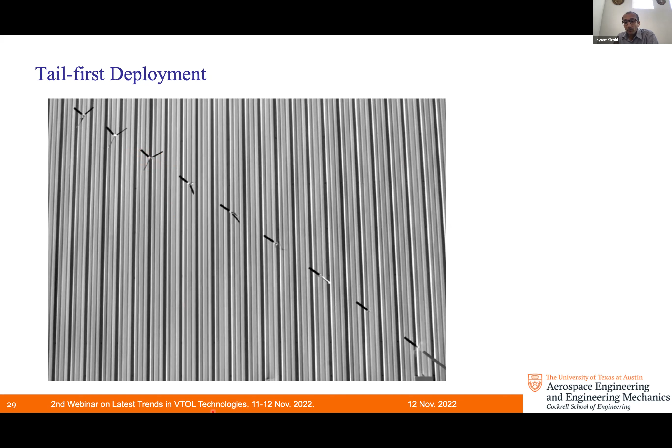I have a little video here at the end. We did a drop test from another drone. Up here in the top, there's a drone that can carry a large payload, like a 10 kilogram payload, and we're taking video from a small drone flying around and looking at it.

The small drone will fly up there. This big drone is carrying one of our larger prototypes, which has an all-up weight of about half a kilogram. You can see that it has a tail, so as you drop it, it doesn't undergo any kind of precession. You'll see the video here.

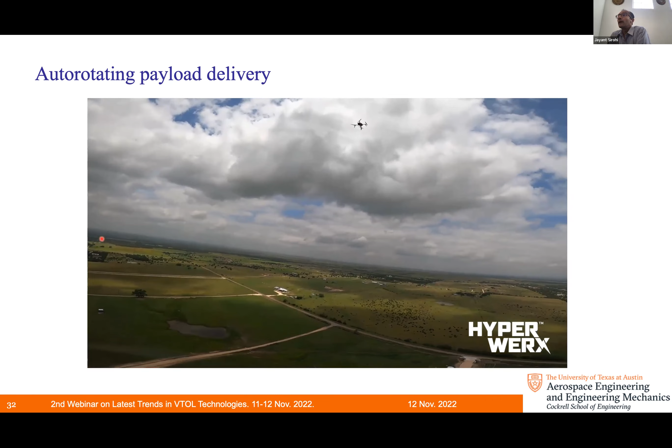We're flying up towards the other drone. You can see our prototype hanging from below. Now it's dropped, it deploys. Initially there is some precession, but now it's stabilized. As it comes down, it's stabilized — stabilized because it has a tail. The tail has to be above the rotor plane, and you have to design it so that the stability is guaranteed.

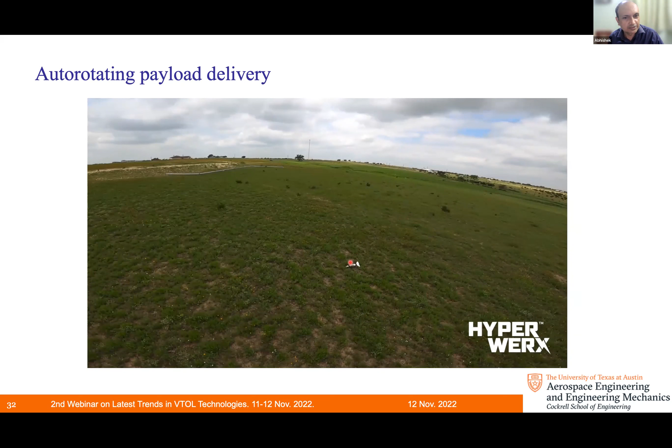Another follow-up question: right now is it only a fixed pitch setup, or do you have a collective pitch change? There's no collective, it's still all fixed pitch, but there is a cyclic pitch. It's a two-bladed rotor, and you can do cyclic pitch to control the sideways forces, but no collective pitch. The collective pitch behavior is all completely passive.

Deployment of the blades and this pitch sequencing is all passive, just to minimize complexity. But you could argue, why do we need to do that? You can have a regular swash plate and program in the collective pitch. That way, just before it lands, you can do a flare also, to minimize the descent velocity further. So basically, you can make an exact replica of a helicopter with a swash plate and proper flight control laws.

Only difference will be the deployment. You just have to make sure that the blades deploy. You still need the skewed hinge so that it deploys and starts initiating rotation in the correct direction. And after that, everything else can be swash plate.

So this is something easy for you. You can do it in your lab quite easily, I'm sure. Actually, we had done that already. We had presented that in VFS also.

I see, the boomerang, I remember the robotic boomerang, right? No, not that one actually.

For the normal conventional helicopter, we did autonomous autorotation for that. So we switched off the motor, and it could actually just come down vertically. We did it in forward flight also and in hover also. And in that we are able to do flare and all those things.

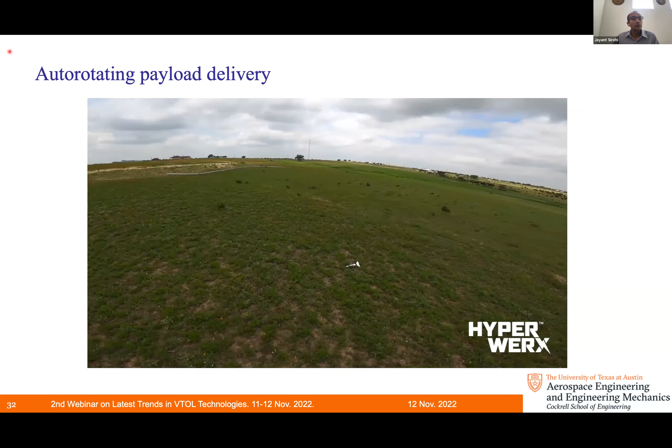So all you have to do is find a mold that is a circular cylinder. It doesn't need an airfoil cross section because this is a very small rotor, right? And it's spinning up to 2000 RPM, but the Reynolds number is still not that high, so you don't really need an airfoil shape. You just need a thin circular arc that will work quite well. You're not going to stall or anything, so you'll work fine in the linear regime of your airfoil.

Sorry sir, sorry to interrupt. So you have a circular arc airfoil, you can create this by putting up your layup on a cylinder, basically just a metal cylinder of the correct diameter.

And depending upon the angle between the layup and the central axis of the cylinder, you can introduce twist or no twist and so on. Okay sir, I got that. Thank you, sir.